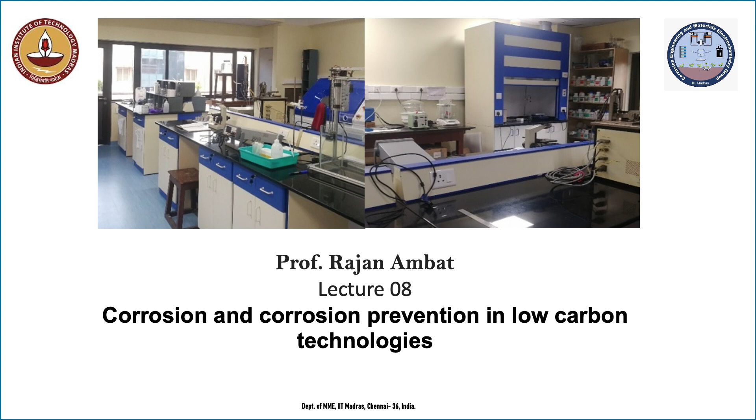So let us look into a little bit of corrosion issues and what people do there. I will mainly discuss wind turbine and carbon capture and storage related corrosion issues. That's what I will majorly focus on in this part, and I'll also talk a little bit about fuel cells and electrolyzers, and some other things from the literature, then give a perspective on other energy storage cases, showing what could be the corrosion issues.

When you look at all these, wind turbines produce electrical energy, fuel cells also produce electrical energy, while electrolyzers on the other hand produce hydrogen as a fuel, and that hydrogen fuel can be used elsewhere either to produce electricity or to be burned.

In all these cases, this power to X is also becoming important. People say power to X. Power to X means you are producing power, and that power is used for running different things, for example. There is something in between here, and that's where the importance of electrolyzers and things like that comes in.

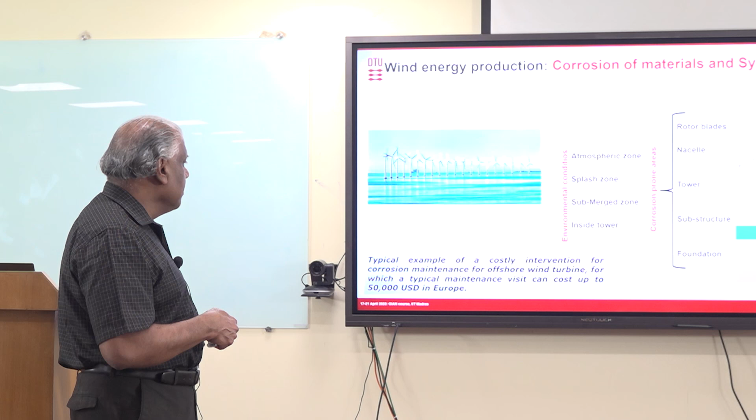I mentioned this in the last days, a typical example of a costly intervention is corrosion maintenance for offshore wind turbines, which costs about $50,000. So this is also an important thing. That's also a reason there is another strategy coming up related to wind turbines - proactive design and maintenance, which I mentioned earlier and will not take up again today. I will come to that together in Friday's lecture.

But let us look at the corrosion part of it. This is the way you can divide the whole wind turbine system. You have the foundation, which is going into the mud below the sea, and there are many technologies related to this, like the monopile, where just one structure is going down like a pillar. And there is another type with many legs - different technologies related to putting it under the sea.

Now they are also thinking about the floating type, meaning the entire thing will be floating in the sea, with something attached just to stabilize it, like a stagnant ship existing in the sea structure. So that's the foundation. Then there is the substructure part, then the tower part, then the nacelle where all the parts of the wind turbine are sitting, and then you have the rotor blades.

So there's erosion, and there can be particles, and since it's rotating at very high speed, even small particles hitting the surface can hit forcefully, causing other problems for the rotor blades - but not corrosion, since we're talking about metallic parts and the blades aren't made of metal. These are the kinds of things we have in the wind turbine, but we can also see corresponding differences - not just the corrosion problem itself, but the exposure environment is also different.

You have corrosion inside the tower. Maybe inside the tower the environment is a little bit more benign, because something has to enter into it, so it's not directly exposed. So the condition inside the tower - this tower is an open tower.

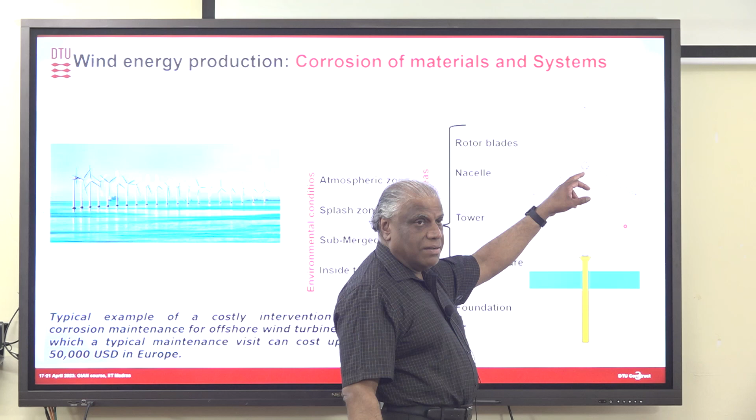It's like the base of the tower will be the size of this room. The wind turbine structure's diameter comes down as you go up. The bottom part, for the biggest wind turbines, may have a diameter the size of this room, and inside the tower it's like a building - you have a lift, and through that lift you can go up to the nacelle. Then there's an opening to the nacelle where you can get in, and that's how technicians go up to repair different things. So it's an open structure inside, with a lot of equipment sitting inside the tower as well, like the lift and other things.

So the corrosion inside the tower is also important, because there are so many things which are sitting there. Inside the tower, for example, there's the submerged zone. If you look here, below the sea you have that part, and then you have the splash zone.

You have different corrosion here because the seawater is splashing, and when seawater is splashing you get much more corrosion. Why? Alternate wetting is one thing, and also because of the higher amount of oxygen coming in, you have a higher corrosion problem - that is splash zone corrosion. Then we have the atmospheric zone, mainly the upper part, where aerosols and things like that are coming up, causing corrosion problems there too.

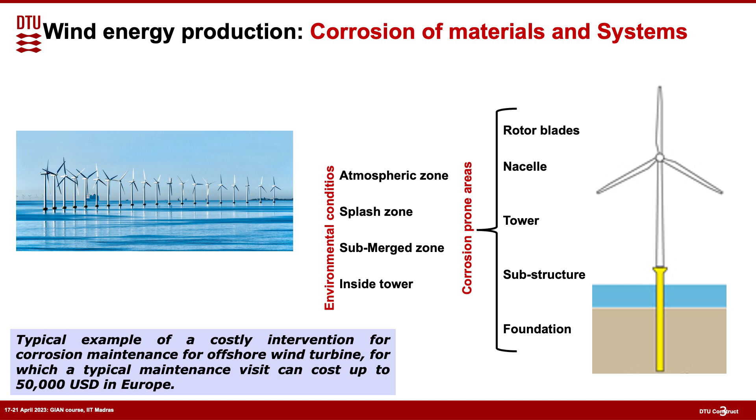So that's the way we can divide the corrosion problem in the wind turbine. This part as well has corrosion problems. Of course, it's not necessary that all these corrosion problems are relevant for everything, but there is a corrosion problem.

For example, here you can also have differential aeration, depending on the oxygen concentration, causing that kind of corrosion. You can have microbes sitting there causing microbially induced corrosion, and these microbes can also produce hydrogen as a metabolic mechanism, which can lead to hydrogen embrittlement issues.

And if you look at it, there is a lot of fatigue loading here, because when this is rotating, although we don't see it, there is a lot of vibration in the tower. Because of the wind and the sea, this is actually flexing a little bit, so there is a lot of fatigue loading. That means if hydrogen goes in, you can have hydrogen embrittlement assisting fatigue failure. So the mud zone also has a problem.

But maybe from the corrosion point of view, more issues are here rather than in the mud zone, because that area is inside the mud, and the corrosion there is less. But because of the splash zone, there is much more corrosion in this area.

So there's waterline corrosion - pitting due to differential aeration in this area. Again, they say it's pitting, but that depends on which material you're looking at and things like that. And of course, these structures are probably all heavily painted.

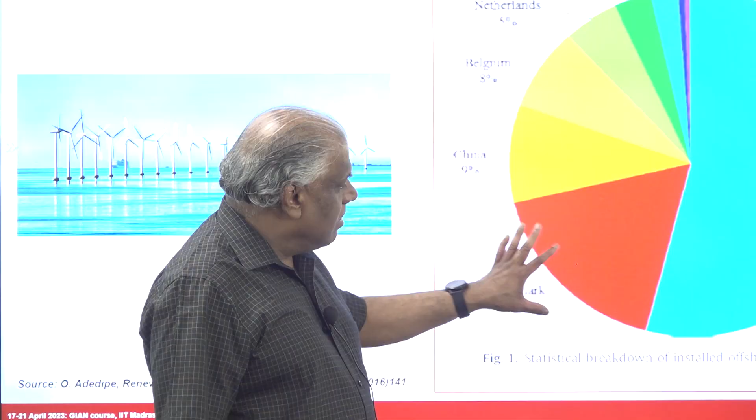Otherwise, Denmark is at the top in wind turbine installations and producing wind turbine energy. But you can see there are a lot of wind turbines installed in various places, and many of these wind turbines are offshore.

Copper is mainly related to electrical applications. Inside the nacelle, you have this generator which is producing a lot of electricity, and this generator has to be connected to electronics. So the power has to be transferred. What is the material usually used for power transfer?

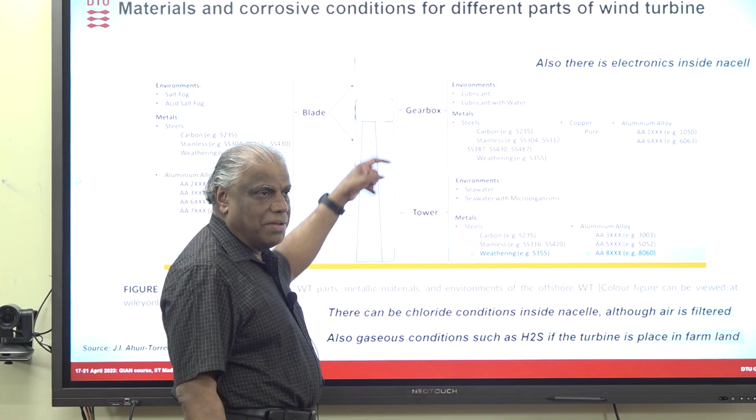That's the reason aluminium is used. So inside the tower there's a staircase made of aluminium, the lift part is made of aluminium, and all those things. So the load bearing structure is always steel in the case of wind turbines. Only accessory materials are made of aluminium, which also shows that corrosion of aluminium is not critically important.

Even if the staircase corrodes a little bit, it doesn't matter. Even if the cable tray in the nacelle corrodes a little bit, it doesn't matter like that. But much more important is the corrosion of steel parts and things like that. So there is a lot of steel and stainless steel and things like that.

Now if you take the other side, the blade side - not the blade itself, but some of the other parts of the blade - again there is a combination of aluminium and steel material. That's what you see. Taking away the electronics part, which I'm not discussing, these are the kind of things you see.

Now it's understandable that there's a corrosion problem here, because you have seawater splashing and creating a lot of corrosion. You can see that because of the agitation in the sea, this chloride condition will exist all over, because there are a lot of aerosols coming inside the nacelle. Usually the air is filtered, so all the air getting into the nacelle is filtered.

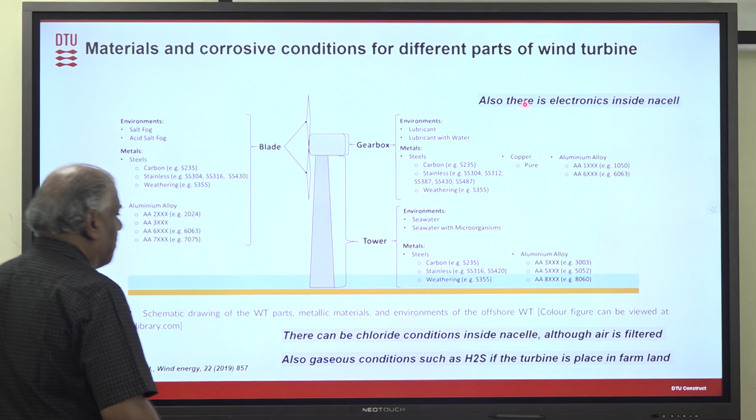There can still be chloride conditions inside the nacelle, although the air is filtered, because this filter is only for aerosols and particles. That means H2S gas can get into the nacelle too, since the gas can diffuse in like humidity, and it can also diffuse if the turbine is placed near farm land. I'll show you some examples of that.

So it's not like the nacelle condition is perfect. Inside the nacelle you can have chloride conditions and H2S conditions. As far as the humidity part is concerned, it depends on the time.

When the wind turbine is working, the gearbox inside produces a lot of heat, and that way the humidity is displaced. But most of the time the problem with humidity comes when the wind turbine is not working. The turbine can be shut down for 2 to 3 months for repair work, and then the humidity inside the nacelle will be very high — that's when most of the corrosion takes place.

So if you take the structure, you can see it like this: you have the wind turbine with blades, connected by this shaft to the gearbox. The gearbox is there to increase the number of revolutions coming from here, and that is transferred to the generator. The generator produces electricity, which is then converted using these electronics here to regulate it, and then that is connected to the grid. So this is the way it works.

So mainly the copper parts I'm talking about go from the generator to these electric connections here, and many of these parts are made of copper because we're talking about very, very high current. You need a real copper bar to take that current — a small wire isn't enough to connect between these two. So a real copper bar is needed. That's more or less the structure.

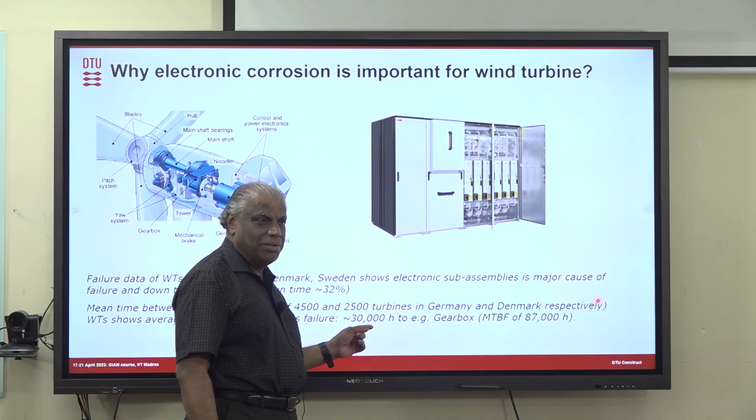They also calculated the mean time to failure for different sub-assemblies. It shows that an electronic failure occurs every 30,000 hours, compared to a mean time to failure for a gearbox of around 87,000 hours. That means that by the time a failure occurs in the gearbox, you'd need about 3 visits for electronics, because you could expect 2 to 3 electronics failures within that time, since the mean time to failure is almost 1/3 of that.

Now we can also see how this knowledge will help them to plan as well. So electronics is one of the weakest links in the wind turbine, and especially with the use of wind turbines in offshore conditions, it is becoming much worse. We will look at that in more detail tomorrow.

The reason the nacelle condition is quite good if the wind turbine is working is because the gearbox is producing a lot of heat. So most of the problem comes when the wind turbine is not working. When the wind turbine is not working, it becomes very, very cold.

Because you need to think of this as a very thick metallic sample. The problem with a very thick metallic sample from the corrosion point of view is that it takes time to heat up and takes time to cool down. And this is where atmospheric conditions make the corrosion problem more important.

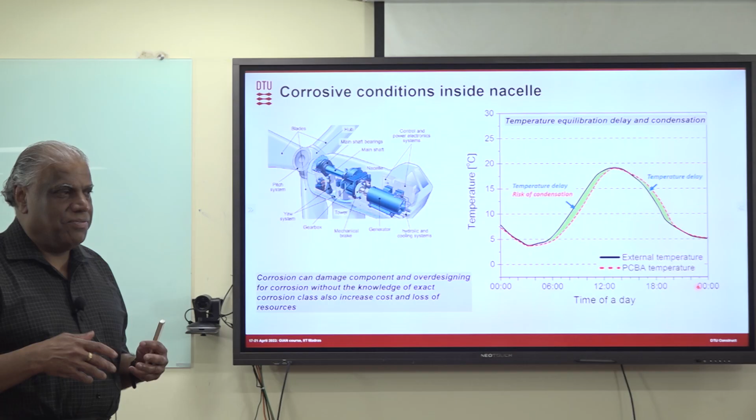I don't know whether this occurs here, but maybe this happens in December, January time. Have you seen that in December, January, when you go out and look at the car, there is a lot of condensation on it? The reason that condensation happens is because at night the temperature was colder, and there is more humidity in the air.

In the morning, the sun has risen, so the atmospheric temperature has gone up, but the car will take a little time to heat up. Since it takes time for the car to heat up, the car is still cold and condensation occurs on it. It will be there for about an hour, and after that it disappears.

So this is exactly what happens in the nacelle. Overnight, if the nacelle is off, because of this delay, that's what is shown here. This is with a PCBA, but there is a delay between the PCBA temperature and the external temperature. You can see the PCBA temperature is rising, but it is still colder than the external temperature, so this difference is what causes condensation inside.

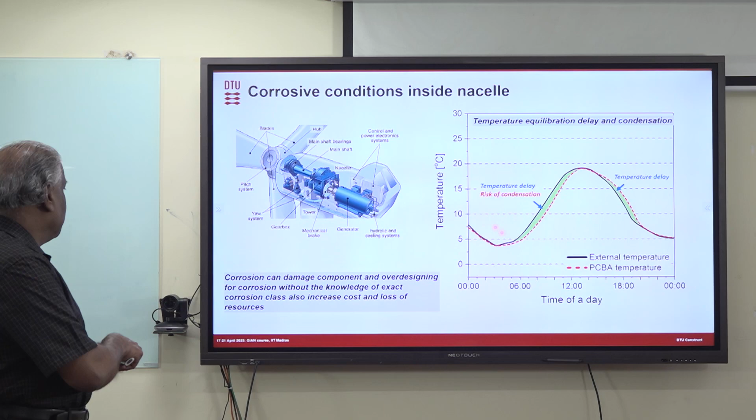So the PCB is just an example, but you can think about any material sitting inside, and that causes condensation at many different parts because of the heavy metallic parts, and then you get the corrosion problem. If you take any level of humidity and make things cool, you can see that you get condensation.

Like if you take a beer can from the refrigerator and keep it outside, you get condensation because the beer can is cold and the outside air is hotter, so you get condensation like what you see on the car. These kinds of things are accelerated by chloride deposition, so if there is chloride deposition inside, these effects will be accelerated. We will look at that in the last lecture, how this deposition assists these processes.

So what we did in our work is that we did a lot of work with Vestas, one of the companies that produce wind turbines in Denmark. This is one of the world's leading companies producing them. There are very few companies producing wind turbines: there is Vestas, a Danish company, and there is Siemens, whose wind turbine part is also in Denmark.

Actually there's also an Indian company called Suzlon or something like that, and there is a Spanish company. So not many—there are probably 7 or 8 companies producing wind turbines, and Vestas is one of the leading companies. Almost half of Vestas is in Chennai. I don't know exactly where it is located, but half of Vestas is in Chennai.

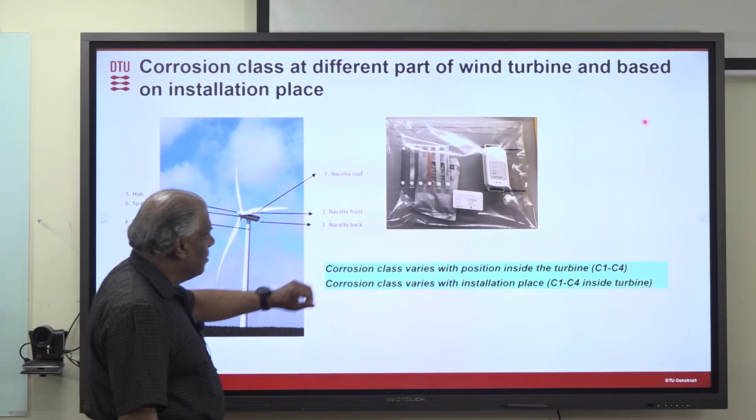We did a study with them, a kind of corrosion analysis. In this particular case, at the time we were doing it, we used corrosion coupons—I think silver, copper, zinc coupons, aluminum and steel. All these coupons, along with humidity and temperature sensors using a standard method, were kept at different parts of the wind turbine for one year. After one year we took them out; during that period they collected humidity and temperature data, and the coupons got corroded.

After 1 year, we can analyze the corrosion level, and from that we can determine what kind of environment was there inside the different parts of the wind turbine. From the corrosion product, we know what it is, and from that we can predict the environment and corrosion level. We can come up with the corrosion class that corresponds to the wind turbine, and all this information is useful for Vestas to plan different things.

We exposed such coupons in multiple places: bottom of the tower, top of the tower, in the hub, and inside this part here. We had sensors inside the nacelle, both front and back, because the electronics sit in the back of the nacelle. So all these places we had coupons, and then we take them out and analyze.

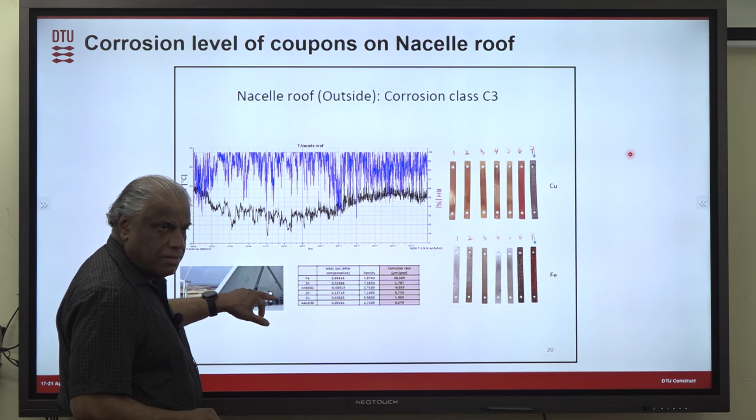Here you can see, for example, I took one wind turbine to show how it changes. This is the nacelle roof — top of the nacelle, outside. This coupon sits outside on the nacelle and collects humidity data. The blue color represents the humidity data, and you can see that humidity is always 100% outside — always at saturated humidity level.

That means there can be a lot of corrosion problems there, which is what you see in this table, which I'll expand. If you look at the corrosion level, it's quite high here, especially for steel — around 38 micrometers per year, which is what you get on the nacelle roof. But the important thing is, I'll show you another slide to see how it varies within the same wind turbine. This is outside, and from the level of corrosion we can determine the corrosion class. Here, the corrosion class is C3.

If you take a C5 as a sea side, imagine from the sea side, and C5 is inside the sea, and C3, C4 is somewhere away from that farmland. So around that condition, the C3 and C4, that's the level at which you have the corrosion right here. Then we go inside the nacelle, wherever it's put, and there we determine and see that the corrosion class is C1, and you can see that the corrosion rate is much lower compared to outside, inside the nacelle.

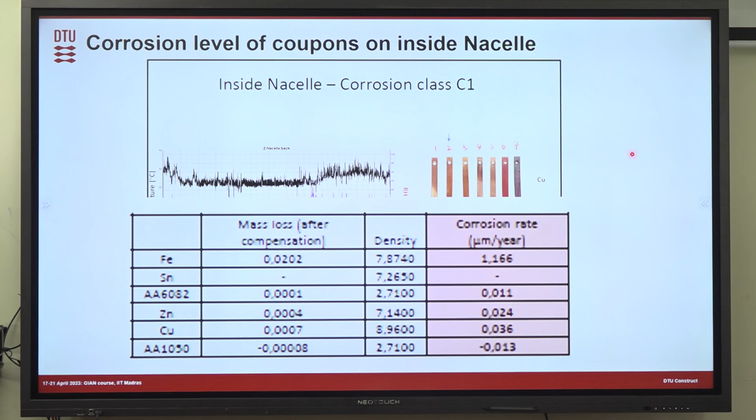Inside the nacelle, the humidity level is much lower most of the time. You can see the humidity level is probably only around 60% or 50%, except in some time it has increased, but otherwise humidity level is lower, and that also gives a less corrosion rate. So there you can compare that corrosion class 3 outside, and the corrosion class is coming to C1 inside the nacelle, on the same turbine for example.

Oh no, I think you need to ignore that. Basically what it shows is that the corrosion was so low here that you just ignore that value and take it as 0, because the corrosion rate is so low in this case, and when we clean it a little bit of material is removed from the cleaning process, and that is what you see. So it's 0 basically.

I don't remember the exact size, but it's a standard, an ASTM ISO standard, and I think it is around 4 or 5 centimeters, and this width is around close to 1 centimeter or 1.5 centimeter.

Yes, this is one set. Like if you look at here, this is one set, like this way. So you have a plastic board, and it is put like this, if this is what you are asking. So each one is one material.

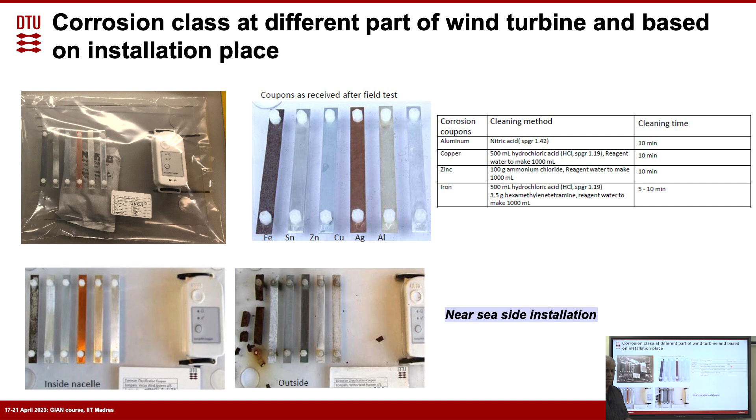If I understand correctly, this whole thing is kept at different places. So everywhere you have all these materials, and you have a humidity and temperature sensor. So we get the humidity and temperature data from everywhere over this one year period, and also we get the corrosion rate, for each material concerned, not everything, but for example, iron.

People have done the experiment and classified into C1, C2. Similarly for zinc, there is a corrosion class and everything. So all these are based on that. If you look at the copper, iron, the distribution of iron, distribution of zinc here, like that, and based on all these it is approximately the C3 class.

So it's everything considered here. Put in other way, in the C3 class, corrosion of iron will be higher compared to corrosion of zinc. Corrosion of zinc will be lower in the C3 class. In C1 class also the ratio will remain almost the same. So it's based on all of them, it is coming to the C3 class. That's the idea. It's just compared with atmospheric corrosion data where it is classified into the C1, C3 level. Approximately, I'm not saying it certainly matches that, but that way it is classified as C3.

Is that what you're asking? Yeah. So it's not just based on one metal, but considering the whole different things like the distribution of copper, zinc and iron. Yes, exactly. Similarly for the zinc as well. So you can see that basically if you take this value of the iron and this value of the zinc, in both cases it is close to C3, like that.

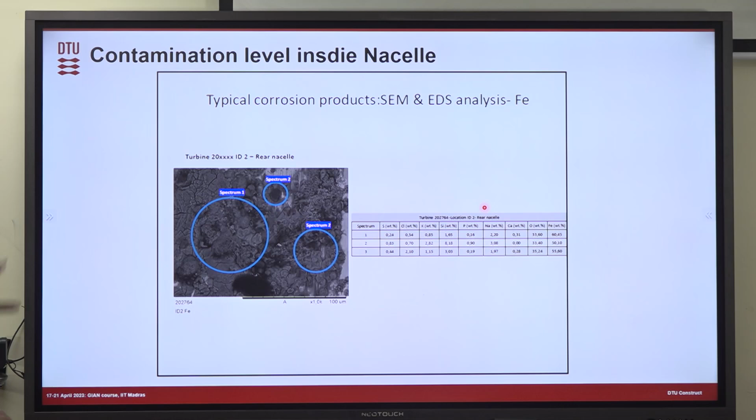We analyze the corrosion product, then we do the SEM analysis and we analyze the corrosion product. The important thing here is to show that there are many things you will see here. Important thing to show is that it has chloride. This is coming from inside the nacelle.

This is from inside, there's a spelling mistake there, it's inside nacelle, and you can see there is chloride and sodium, which also shows that this must be sodium chloride. So although the air is filtered, still some aerosols are getting into the turbine, and that is probably causing this chloride to appear. You can also see a few other things, there is sulfur. So probably the reason is that there are some sulfur gases in the environment which also entered into the nacelle and created some sulfur-containing compound.

But we couldn't answer at the same time why this phosphorus is coming and like that, because it's too complex actually. But on the other hand, ignoring the things we don't expect, if you take the other one, at least we can see that there is chloride and sulfur. We also have seen that when we go to a farmland and measure the sulfur gases, we could see that there are sulfur gases in the air.

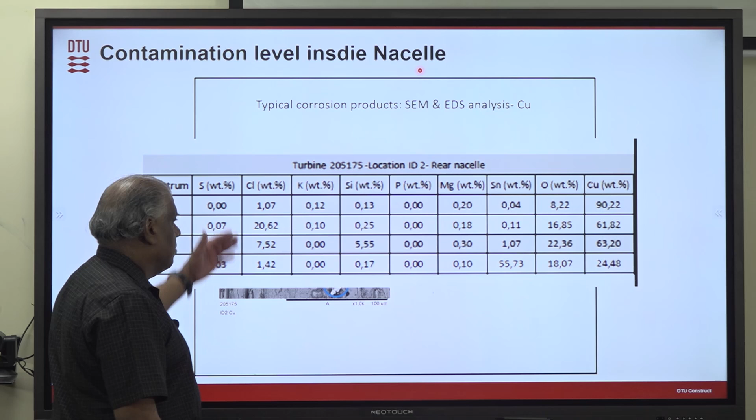And this is another analysis. Again, you can see that there is chloride, and there is a lot of chloride here. It is showing that although the air is filtered, chloride can still be there inside the nacelle. And if there is chloride, you'll see, like the last class, you don't need high humidity to get condensation, because chloride is hygroscopic, so you can get condensation with a lower humidity level as well.

Why have we done all this? Because this is another one, and it is still showing the same thing, that there is chloride. So everything is to indicate there's chloride. Why did we do all this? Because we did this in Denmark, China, Uruguay, Peru, Nicaragua, Dominican Republic, Chile, and Chile farmland, coast and farmland.

So this is at different places in the world to identify what the corrosion class is, more or less. Once they know the corrosion class, this company, Vestas, can make a better decision related to how they want to supply and make the wind turbine. One thing they found was that in places with a lower corrosion class, they were still selling the wind turbine made for C5, because they didn't want to take chances. So they sold the wind turbine made for C5 class when that was not actually needed, so they can save the material, and the customer can save on cost.

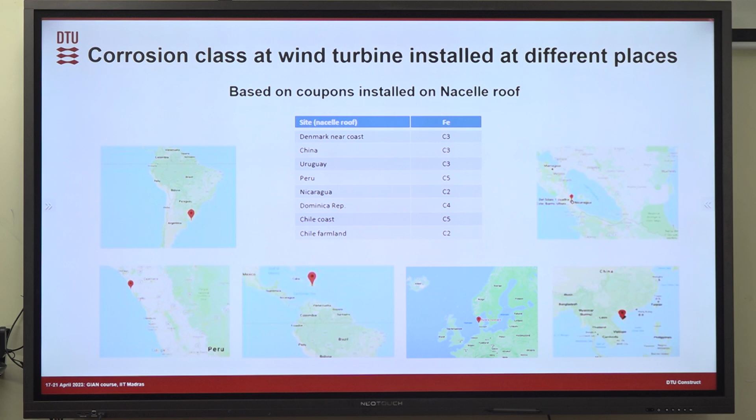But the problem with this measurement is that we use coupons, and we keep them for 1 year, and during that year it is blind - we don't know what is happening. But now we've made a sensor, an online sensor, so we can get real-time data like humidity and temperature, and there are two other sensors determining the condensation possibility and things like that, so we can get much more online data using that. That makes it much easier - we don't have to wait for 1 year like that.

Second thing is that, here we have the corrosion class we measured. In all these places, basically all this corrosion is coming because of the external climatic conditions - the humidity and temperature. So we made a climate app which this company can use. Looking at the climate app, they can understand what kind of climatic condition exists at a given location, and they can easily find that. And once they find the climatic condition, they can also look at what is the corrosion class there.

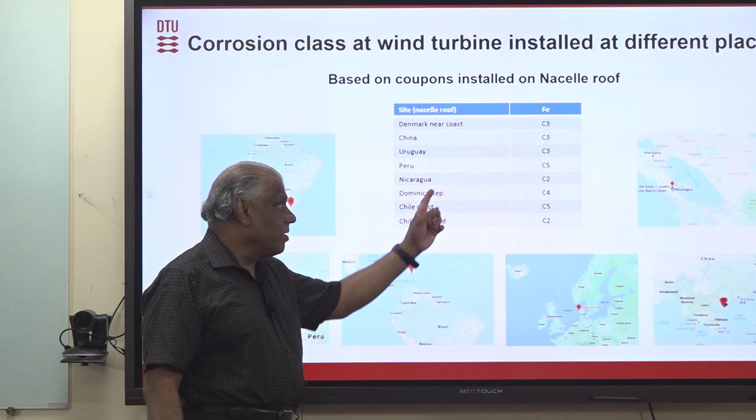That corrosion class in the climate app is not coming from our testing - it's coming from CECRI's atmospheric corrosion test sites, which they have at different places. Probably your institute, your building research institute, has one too - do you have an atmospheric corrosion test site? No, you don't have. Okay. But CECRI has one, I know CECRI has atmospheric corrosion test sites at different places. Similarly, in the world there are many places with atmospheric corrosion test sites, and all these people have determined the corrosion class related to it.

So what we did, I'll show you, is that in the last class we made the climate app. That means we collected all the climate data from the world, and we used a machine learning algorithm to group this climate data so the entire world can be divided into a few zones - high climate, low climate, and so on. Then we overlapped this climate data with the atmospheric corrosion data collected from different atmospheric corrosion sites, so you can also know that a given region has C4, C5, and so on.

So now we overlapped their corrosion data, but what we are trying to do is that since we have data at different places, we can interpolate. And that way we can make a little bit more information on that. But I'll show you that.

This climate app is helping companies to take these decisions so that they don't depend only on coupon data, but use the atmospheric test data which people have developed, and humidity data available. When I show that app in the last day, I think you will understand what it means.

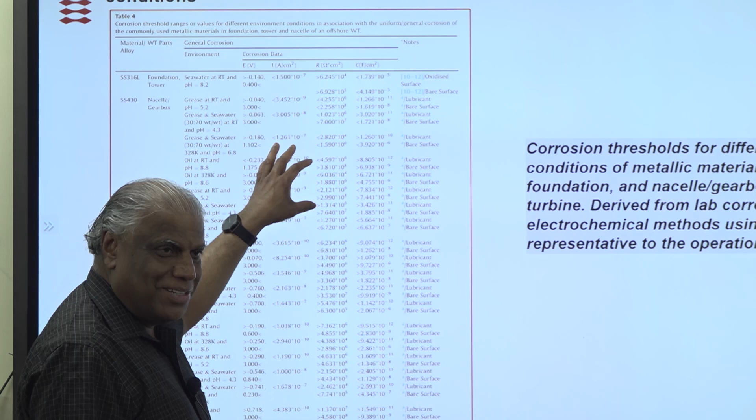This is not coming from our study, but from another study. That's the reason I put that table, although it's probably difficult for you to read. What they did is they took materials like steel and aluminum used in the wind turbine, and simulated the conditions seen in the nacelle and other places in the lab, then made corrosion rate measurements from that. So they can get an idea: if they use this material inside the nacelle or gearbox, and the gearbox has lubricant, some material is corroding, and that corroding environment will be lubricant mixed with water—what corrosion rate could they expect in that condition? Similarly, in other places with other environments, what corrosion rate could they expect? Like that, they made this table.

I felt it's quite a nice simulation, exactly simulating that environment in the lab. It can be used to make a model out of that, and it can be used again to predict something—meaning all these places need a very, very high protection level.

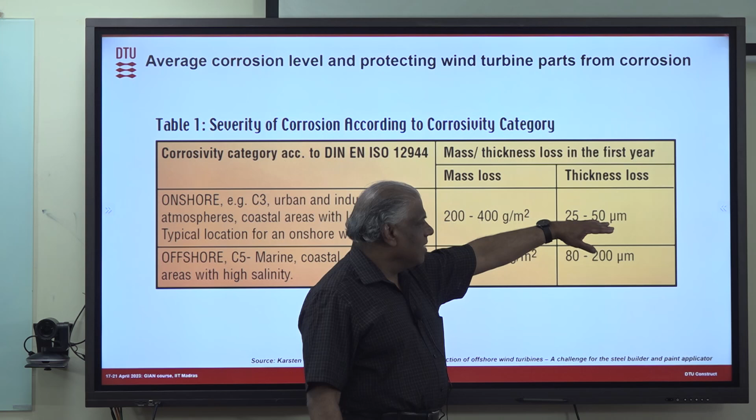So this is just showing an onshore wind turbine where you have C3 conditions and the kind of thickness loss. If you take the tower part, the kind of thickness loss you'd expect is around 50 micrometers per year. That's the corrosion level you'd expect.

And if it is offshore, which is C5 condition, you get into around 4 times that, around 200 micrometers. That's the kind of corrosion level you're expecting, which also means you need to have this level of protection.

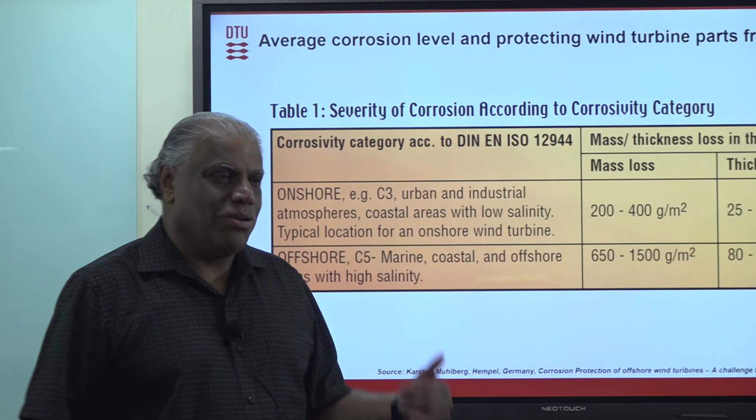Remember that 200 micrometers itself is not a big thing—think about a very thick steel tube for the tower. So 200 micrometers itself is not a big thing, but the problem is that this 200 micrometers is an average corrosion level. In one place it could be 2 millimeters, another place only a few micrometers, like a pitting sort of thing. And then you have the fatigue issue. Most of the time corrosion itself is not causing the problem, but at the end it is fatigue—corrosion fatigue is the one causing the problem. If you have a pit and it goes deeper, that acts as a crack. So that's the issue, just to show it's quite severe in that sense, and you need to protect against that.

So that shows the protection strategy. Just to give you a glimpse of the level of painting they do—this is a C5 marine condition. There are different standards: a German standard, an ISO standard, and a NORSOK standard, different standards in relation to painting. But people follow only one of them, not all of them. It's just to show you a comparison.

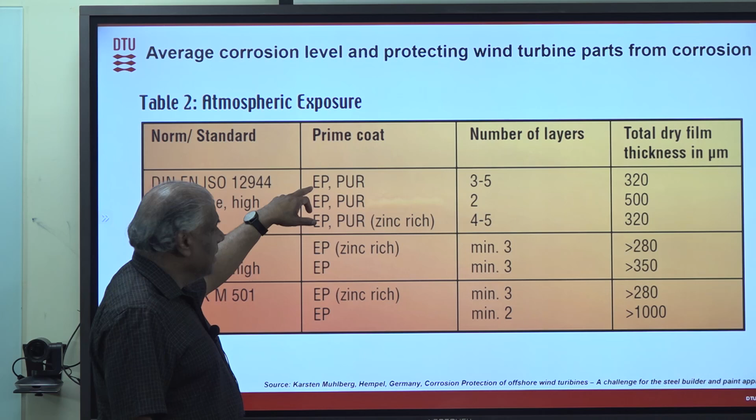Whenever you see EP, it means epoxy resin covered, and PUR means polyurethane. PUR zinc-rich means the PUR also contains zinc plates, so it acts as a galvanic zinc coating—that's why it's zinc rich. You can see they put many layers, almost a thickness of around 320 micrometers for the atmospheric exposure part. The NORSOK is actually much higher than that, going up to around 1000 microns. So it's quite a big thickness of paint put together to protect it from corrosion.

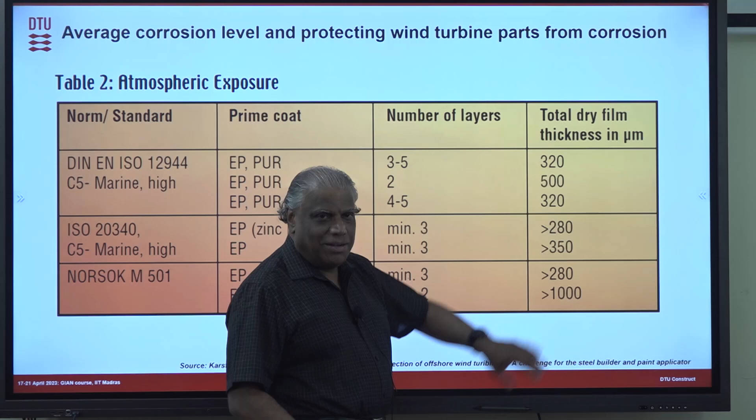So even the painting, they do it at different levels, because it's such a big structure. Every rupee or whatever they can save is an important thing, so they want to save a lot. At the same time, the system has to work perfectly for the period. So there is a lot of things involved in that.

The electronics part, I told you that I will come to in the next lecture. So that's a little bit on the wind turbine part. Then I'll get into another area. Is there any questions related to this part?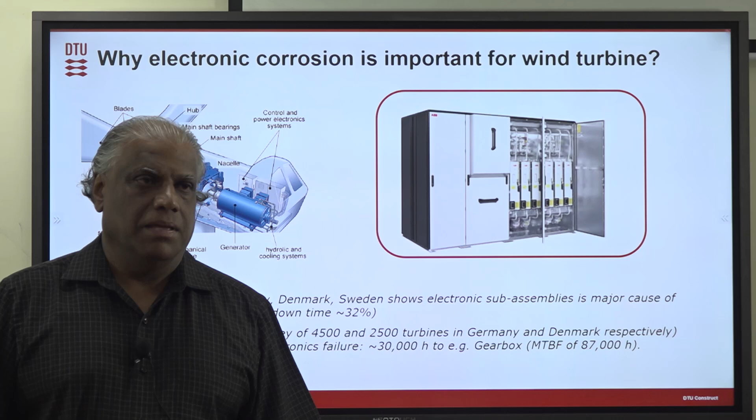Let me see what you mean. It's protected, this part. This part is cathodically protected. The bottom part is cathodically protected. Whatever is in the seawater, that part is cathodically protected.

Splash zone, you cannot protect it like that, right? Splash zone is dependent upon how the water is splashing and where it is wetting. So the cathodic protection may work there, may not work there, like that.

Any other things? Yeah. Yes, you are right, because maybe you remember the first table which I showed. There I was telling that acidification can also cause hydrogen embrittlement, because hydrogen is produced and that hydrogen is reduced right on the surface, and that way it's possible for it to enter. It's also causing the hydrogen embrittlement.

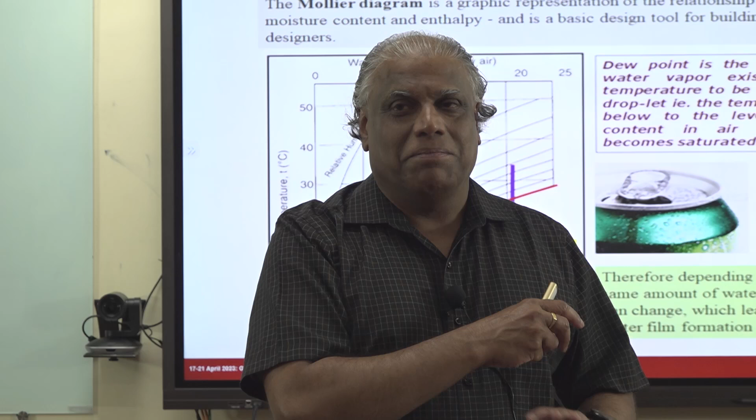I don't know about how much of a corrosion fatigue issue there is in failures. I don't think that, put it this way, none of the wind turbines has failed because the tower failed until now. Only thing is that they know that the tower is going to fail, or the tower will have a problem to take care of. So that's the only thing. None of them has failed because they made it safely enough.

All the wind turbine failures until now are due to electronics, not due to the tower or other material. Electronics, which has a corrosion problem, resulted in fire, and inside the nacelle it caught fire, and then of course everything is destroyed. So that's what happened, not due to tower failure.

Tower failure—I haven't heard of any wind turbine failure due to the tower, but they analyze for corrosion fatigue and do non-destructive testing and all those things. I'm sure that they must have identified whether there's a hydrogen embrittlement issue, stress corrosion cracking, and all those things. So all these issues can be there.

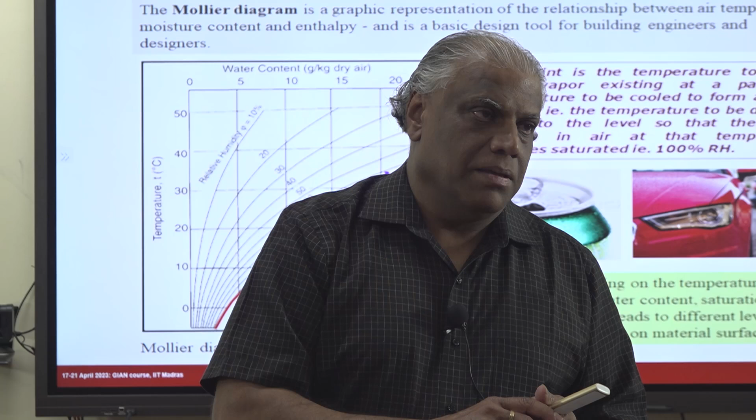Yes, there is. This is in our department, not me, but there is another group. They are working on bearing failures inside the gearbox because of fatigue. And there they say that yes, there is a hydrogen embrittlement issue there as well. Yes, it's true.

Yeah, maybe yes. Yeah. Yes. Then how did you correct those?

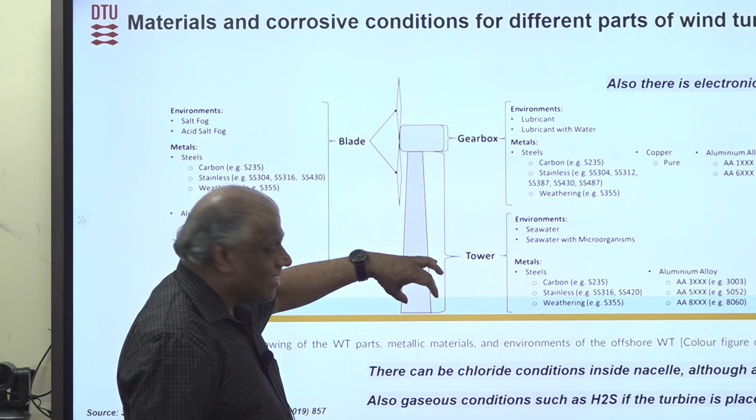I think, if I'm correct, what you're talking about is like in those pictures, you see that rust coloring there, right? But that's after repainting. Yes, they did the repainting, and the corrosion may not be that much. And the question is like this: the wind turbine may work for 25 to 30 years.

So whether you can extend the life until 30 years, this is the question, right? So there's no problem to have it like the aircraft—an aircraft wing can have a crack, as long as the crack is not critical.

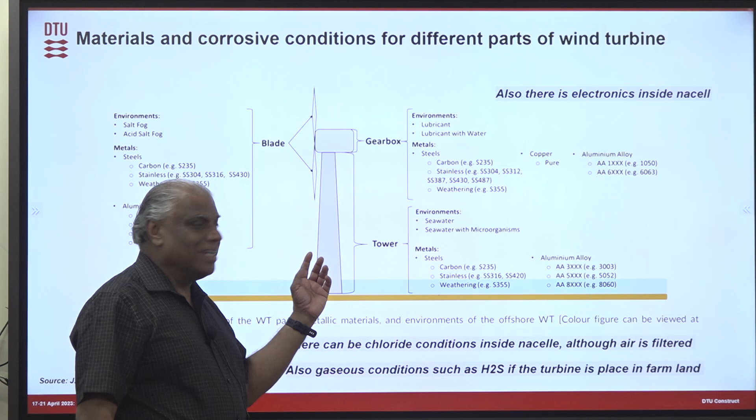Still the aircraft can fly, so it's exactly the same way. If they measure the corrosion level and know from fatigue and different models whether that's critical or not, if it's not critical, the system can still be stable. The only thing is that by the time they start seeing the corrosion, they need to take remedial action immediately—strip the paint and paint it again, and things like that. They need to protect it, that's all. So extending the lifetime to 25 to 30 years is the goal, not completely stopping the corrosion.

Corrosion can be allowed as long as the structure is still stable for 30 years. That's all.

Sorry, coupons, yeah.

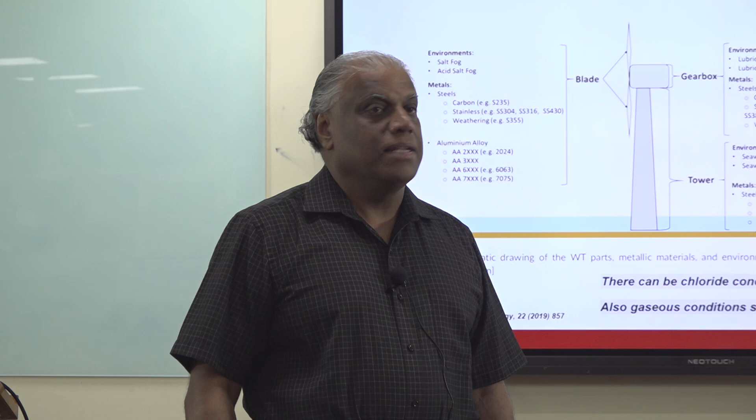The steel we are talking about is carbon steel, so that way it's an alloy. Aluminium is an alloy, a 6000 series, right? But other things are comparatively pure metal, because copper is used as pure metal. Silver is used as a part of electronics as a pure metal. So those are pure metals, and zinc is also more or less pure like that. So those are the pure metals, but aluminium is an alloy and the other one is carbon steel.

So that's because it's imitating what is there inside the turbine.

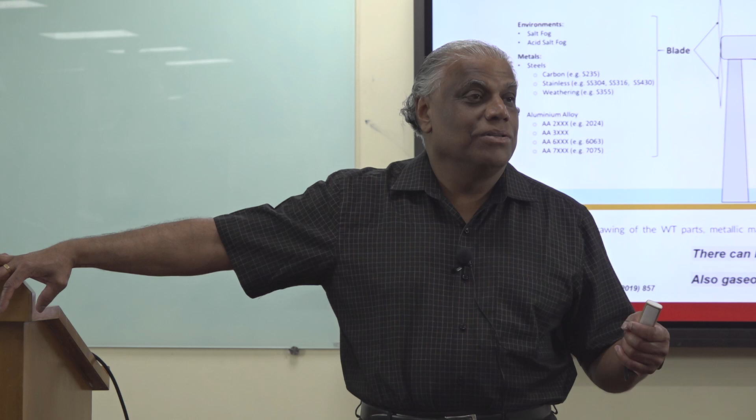Yes, corrosion rate data is - that's what I was talking about. CECRI has that atmospheric corrosion test site, right? That's an example. They exposed many materials there and came up with corrosion rate data over many years. Similarly, there are probably many atmospheric test sites over the world, and this corrosion data is available. So anywhere in the globe, you will be able to find an atmospheric corrosion test site at some places, and that corrosion data is available actually.

Not only corrosion data, there is corrosion data for steel and other materials. There is chloride deposition data, humidity data. So there is so much information there, and we overlapped that information with our climate map. That's what we did - I'll show you later. So that's the answer for it. Every point you don't have, but you have at many places.

And now what we are trying is that when you have the corrosion data at some points, you have these two points of corrosion data, but you have the humidity and temperature data for in between. Using that humidity and temperature data, and using the humidity and temperature data here, we're trying to interpolate this corrosion data to other places.

So there is a lot of corrosion data available from the atmospheric corrosion test sites all over the world. It's a coupon method, actually exposing coupons at different places.

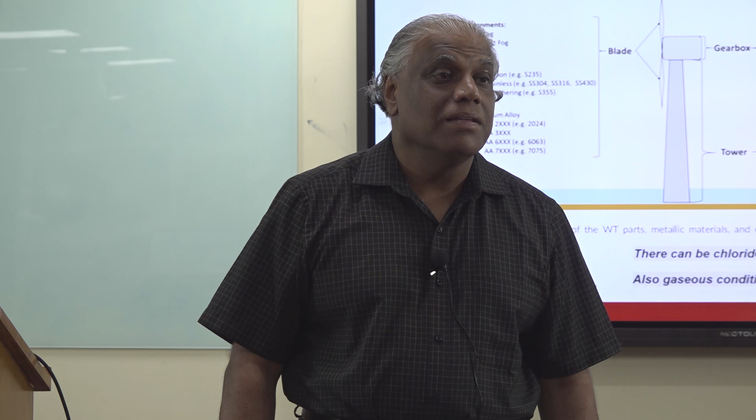Yeah. Yeah. I don't know. You say real-time monitoring method. Sensor, right?

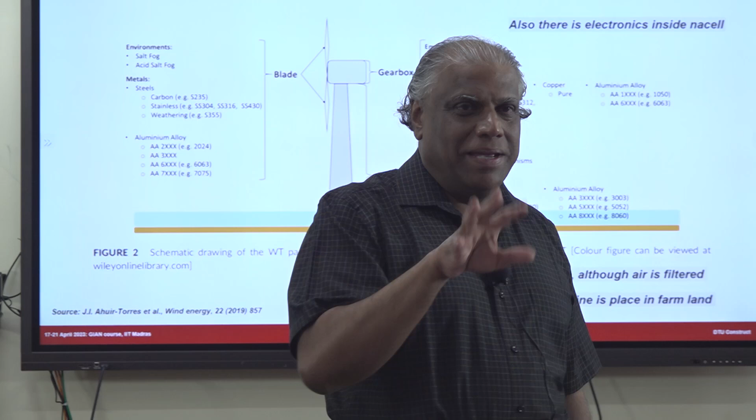You know, there is a paint company in Denmark called Hempel. They are the ones actually making the paints for all this heavy duty painting. There's also a part in India, I think it's Pune, where they make a lot of paint. This company is now working towards making an impedance sensor which can be placed below the paint. Not for normal paint, but for big painted buildings or painted wind turbines where there's a lot of paint. There it is very important to monitor how the paint is degrading.

So they have an impedance sensor which is put below, and they are trying to get online transfer of data and analyze it. Actually, this happened from our lab because we use these impedance sensors so much in our electronics - electronic structures are like that, you'll see when we go tomorrow to our test systems. We use in electronics these kind of comb structures, interdigitated structures, and this paint company asked me, why can't we use this as a sensor for the paint? So one of my PhD students joined there as a postdoc, and he developed it so much.

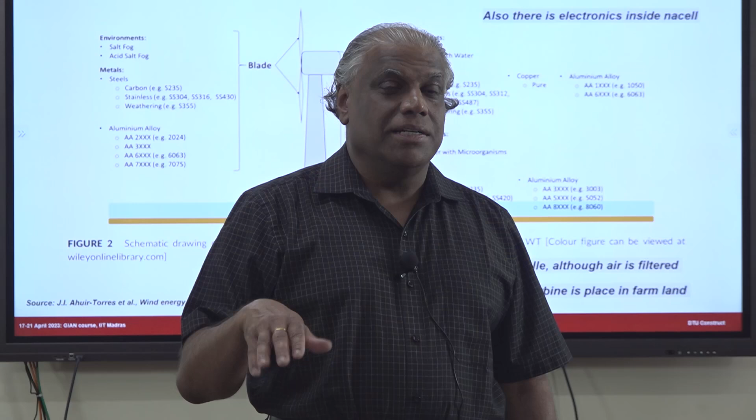What they do is take the metal surface before painting, and they can even do it on-site using a robot. They make a metallic structure by a printing process, then paint it, and this printed metallic structure is connected electrically to the system so they can do online monitoring. If you do a similar thing inside this one, where you have the paint and then the metal surface, or here you have the paint, your cement and the rebar, then you may be able to monitor this.

Of course, the only thing is that what I can give you is this comb structure and general information on that, but everything else - how it is electrically connected and how the data works - is confidential because it's company property now. But that's an example to see.

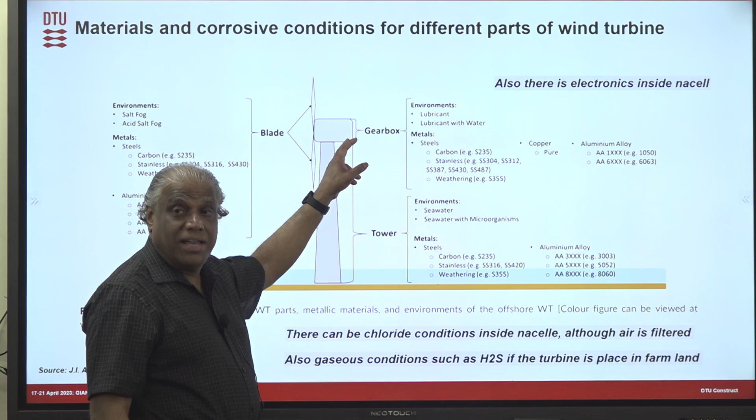So for the nacelle, most of the corrosion problem inside occurs when the wind turbine is off during repair time, because then it is cold. So one way of avoiding that is to use a dehumidifier inside during that time, and that way you remove the humidity. That's a solution. But the only thing is nobody wants to do that. Many customers, Vestas will tell them that whenever you are shutting down, you need to use a dehumidifier inside. But no, people will not do that. That's the issue.

Let's go a little bit into the carbon capture and storage part now.

So the other thing is that wind turbine is a low carbon technology in the way that it's not emitting carbon dioxide, because we are not using fuel to burn and make something. The other way to make it clean energy or clean atmosphere is that you collect the CO2 from power plants and things like that, and then push the CO2 down into the earth, and that way you can store it so it's not emitted into the atmosphere.

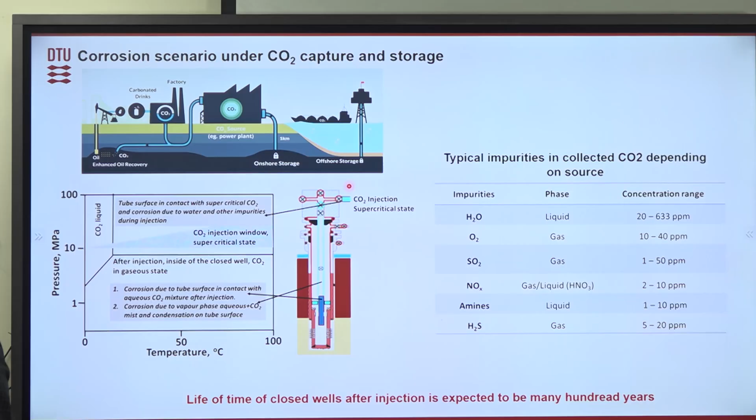So from power plants, factories and things like that, there's a lot of CO2 emitted. You collect that CO2 and liquefy it, and after liquefaction you push it into storage systems, store it and close it. That way you can reduce the carbon dioxide emission.

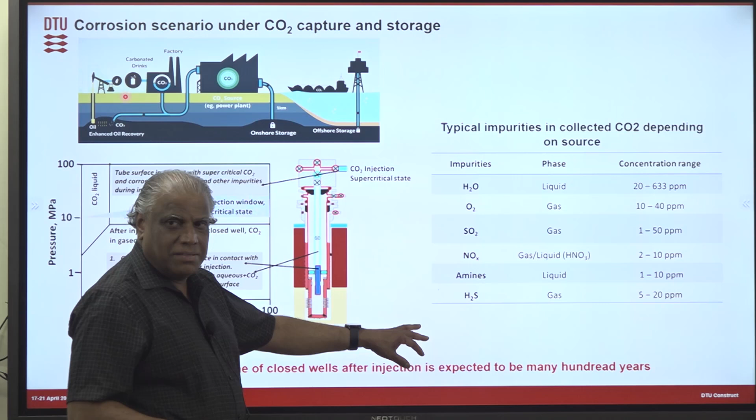This is the kind of thing people are trying to do, with many different technologies coming up. The problem is when you inject like that - think about this oil well shown here. There is already an existing oil well, a reservoir where they had the oil. This is a well, so the oil has been taken out through this well, and now the oil well is empty. There are many wells like that all over the world. Now the question is that this reservoir has a lot of empty space, so they can inject the CO2 down and store it there instead of oil. Once it is filled, you close it, and then it has to survive like that safely for 1,000 years or 500 years without any problem.

That's the condition. So inside this oil well, if you take this part of the structure, it's made of metallic material - metallic tubing. Until you reach the reservoir, you have the metallic tubing, and then the reservoir. If this metallic tubing corrodes, the carbon dioxide can come up - this is the problem, even after blocking it. Those tubing will get corroded, and that's also the problem with corrosion in oil and gas. So there's a lot of similarity with corrosion in oil and gas; only how it occurs is slightly different.

And the material used here is plain carbon steel. Why do they use plain carbon steel? Although there's a lot of corrosion problem, it's cheap. So in order to be profitable, they use carbon steel there. That's the problem - there's a lot of corrosion problem.

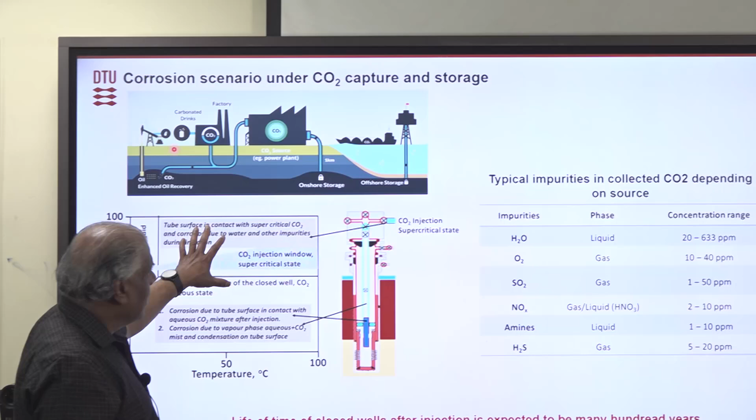Now when you look at how the carbon dioxide injection takes place, they collect the carbon dioxide and put it into a supercritical state. The supercritical state of carbon dioxide occurs at certain pressure and temperature levels - like this conical shape here shows. You can have 50 degrees centigrade, and you need up to 10 MPa pressure for the carbon dioxide to be in the supercritical state. I'll tell you what supercritical state is. If you have a lower temperature in this window, or a higher temperature, you need a higher pressure accordingly.

In this window, the supercritical state exists. Supercritical state is nothing but, you can take it as liquid state. Why is this called supercritical? There is a state between liquid and gas. It looks like liquid, but it is not totally liquid, not totally gas. So that's what is called the supercritical state.

Why are they interested in the supercritical state? Because supercritical CO2 is very easy to transport. That's the reason they want the CO2 to be in the supercritical state. That's the case, that's the way they do it.

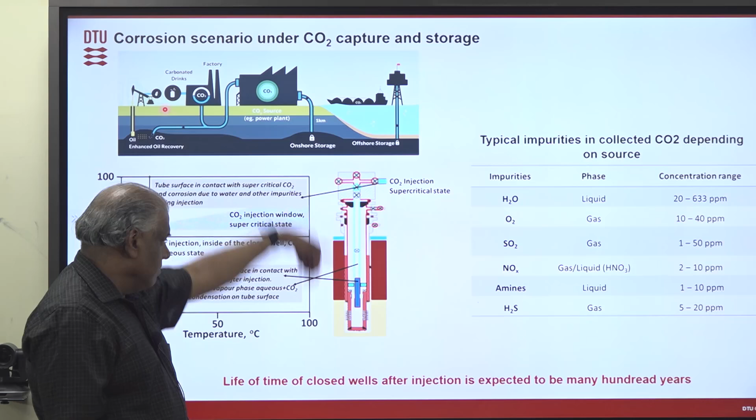They collect the CO2, pressurize it into supercritical state, and pour it into the well. The amount of CO2 collected can be so much that it can be continuous injection. So there can be a place where CO2 is pumped through the tubes, and it can be continuous injection as well.

Now coming to the corrosion problem. What is the corrosion problem? Supercritical CO2 itself is benign. It will not do anything. Liquid CO2 is not corrosive.

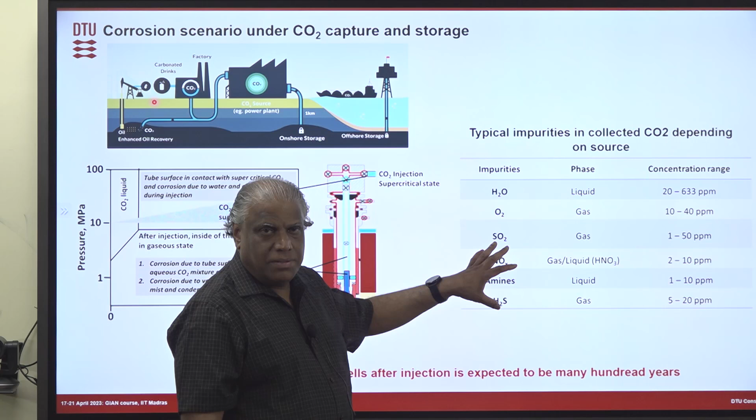The problem comes because any CO2 collected from different sources can have some contamination. It can have a little bit of moisture content, oxygen content, or other types of things as part of it. This water content, moisture content, and other gaseous content at tiny levels is what is causing the problem, and that is what is causing the corrosive environment.

Now, with all those things, what kind of corrosion problem can come? Think that this supercritical CO2 is injected through this tube. While it is injecting, your CO2 is in supercritical condition, with very little amount of water and gases. This little amount of water and gases can condense on the inside surface of the tube.

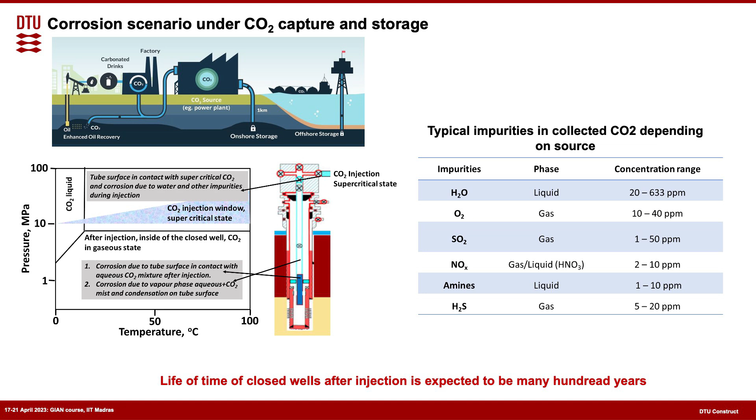But that condensed water has a problem, because it is very little water with these gases dissolved in it. Since it is very little water with gas dissolved, the pH will drop down to even 1, a very, very low pH level, because the pH depends on how much gas is dissolved in the water. Since the amount of water is less, even with a small amount of gases, the pH will drop.

Not only that, when it is pushed in supercritical form, everything is pressurized. When you increase the pressure, you dissolve more gas into the water, so the pH will be very low. So all the water that is dropping out here in this condition will have a very low pH.

Then the CO2 will go down, down, down to the reservoir. Once it reaches the reservoir, during the flow it will get depressurized, and once it reaches the reservoir it becomes gas. But then there is a lot of water in the reservoir, so once it reaches the reservoir it becomes like soda. The CO2 dissolves in the water and becomes like carbonic acid.

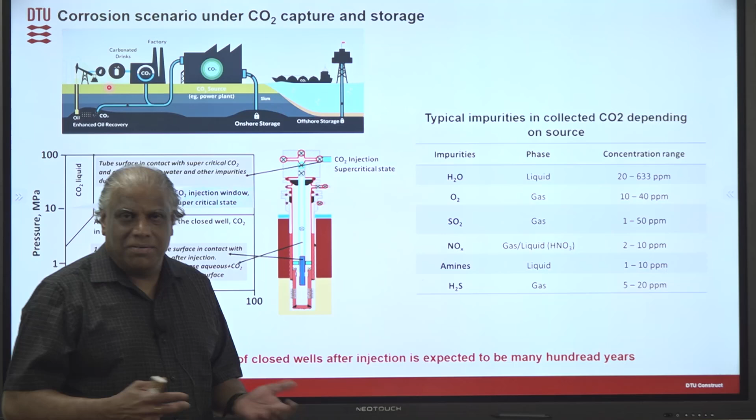Then you have another corrosion problem, carbonic acid, because now it is aqueous phase CO2 — aqueous phase saturated with CO2. Earlier it was CO2 phase saturated with a little bit of water. So this is a corrosion issue, and this is also the complexity of the corrosion. It is not the same, and that's what we are trying to find out.

What they want to find out, while we study the mechanism of corrosion, is to make a model at the end. That model should tell, depending on the purity of the CO2, what the corrosion rate will be. That's what they want — a model to say what the corrosion rate will be depending on the purity of the CO2.

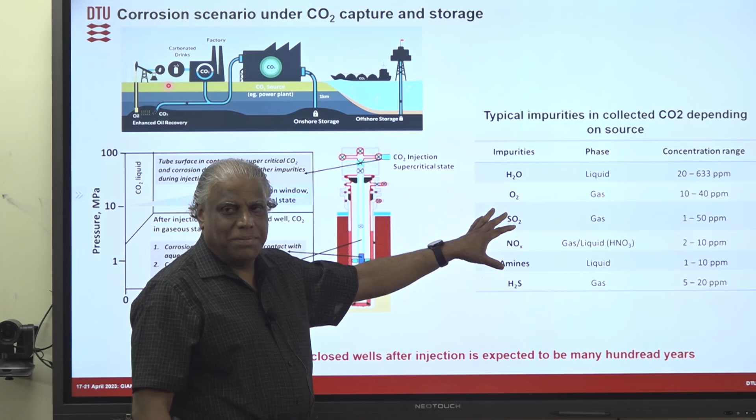We can also look at it another way — they call it sensitivity analysis. Sensitivity analysis means, say today they collected CO2 from one place, and tomorrow they collect CO2 from a cement factory, where they find the SO2 level is 100 ppm. If they have a model, they can put this contamination into the model and say that even with 100 ppm, the corrosion rate will increase only 10%. It doesn't matter — you can inject that information like that. So that's called sensitivity analysis.

So you can also use a model for sensitivity analysis. This is the kind of rough idea to come up with. Good question — you can remove everything, but then the CO2 injection costs become very high.

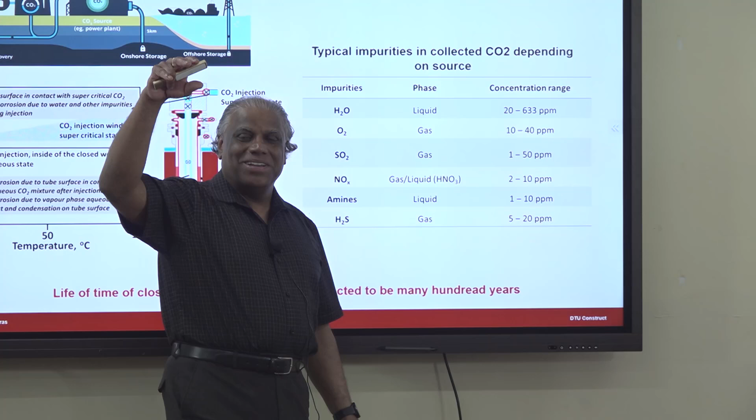So this is another thing. All these processes of collecting the CO2 and injecting the CO2, who will do it? Some company has to do it, right? Companies will not do it unless it is profitable. So where does the money come from? Where do they get the money?

Money is coming from, at the end, for example, what the Danish government will do is say that all the power plants have to pay a tax, depending on the amount of emission they need to pay a tax. A cement company has to pay a tax. This tax money is the one which goes to the company doing the injection.

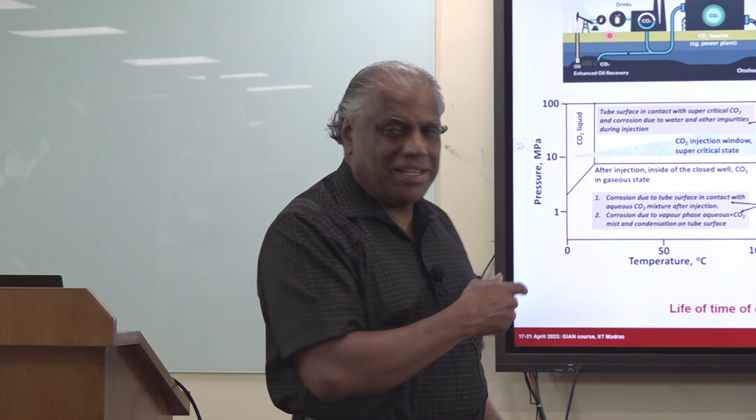If they have to purify the CO2, then it becomes a non-profitable business, so that is not viable, unless the CO2 is extremely bad. So that way you cannot remove the water - you need to inject it with water or other impurities.

So this is just showing that this one CO2 source, the CO2 capture plant, compresses that into the supercritical form, transported through the pipeline, down into the well. So that's the way it goes - the continuous injection from collection to the injection into the well.

So this shows different possibilities. People are also using earlier CO2 to push the oil. Earlier, in order to get more oil, they put the CO2 down, which pushes the oil, and that way they can produce more oil. And that's also a good thing, because that CO2 is then blocked there. So that way also people are trying, but now the focus is much more on just putting the CO2 down into the well.

So this is just schematically showing CO2 injected in the supercritical form. As it comes down, there will be a pressure drop, and there may be special pressure fluctuations. That pressure fluctuation will make this water drop out like condensation. And this water will have a very low pH, because the small amount of water has all these things dissolved in it. So that will have a very low pH condition - you get a lot of corrosion problems here.

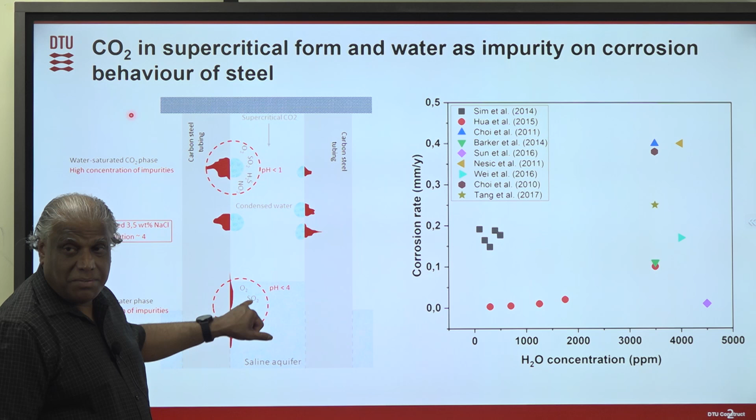Then the CO2 is coming down into the reservoir. CO2 is dissolved in the water like carbonic acid, then you have a pH of 4 or lower than that. So this is like normal oil and gas corrosion, or carbonic acid corrosion. This is what happens - only thing is that even in this case you also have H2S, SO2 and things like that, because that's the part coming from the carbon dioxide.

So here we can see the importance of this - people have done this work. We collected this data from the literature and we are trying to plot it. You can see that different people have done this work, looking into how, with the increase in the amount of water in the CO2, the corrosion rate will change. You can see that it goes up with increasing moisture content in this one. Understandable, right? Because that moisture content makes these gases dissolve, and that way you can have the corrosion problem. So that's what we are trying to look at.

So what we try to do is, since we have a lot of impurities, we do this design of experiment to see really what range of composition we need to take. So we study oxygen from 1 to 10 ppm, and all other things starting from 10 to 1000 ppm, in the lab scale. And why we do that 1000 ppm - because you can see here SO2, H2S is only 20 ppm or SO2 is only 50 ppm, but in the lab scale experiment we study with 1000 ppm.

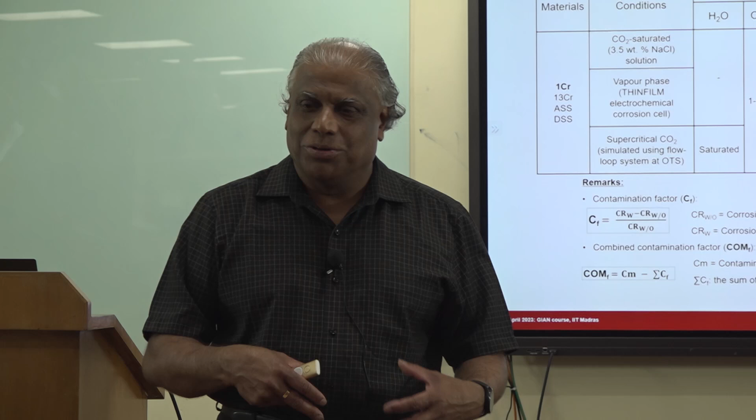Because in the lab scale we are doing the experiment not with the supercritical CO2. We are doing it with 3.5% sodium chloride saturated with the CO2.

At the same time, we want to simulate this condition. Although there is 50 ppm SO2, when that is dissolved, it becomes a very high concentration. So we simulate that high concentration, and that's why we go up to 1000 ppm in the testing. We do these different contaminations, mix them up, and then do DC polarization, AC impedance, and subsequent SEM analysis to understand how the corrosion is occurring and to learn the mechanisms.

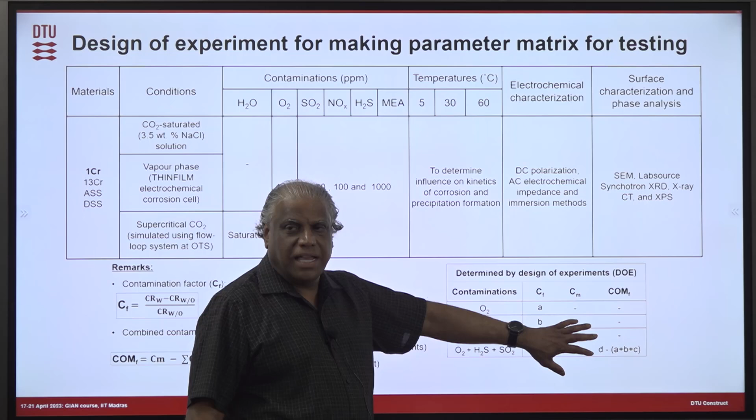We also do the experiments in a design of experiment way, because once we have that data, we can use it with our machine learning algorithm to build the model.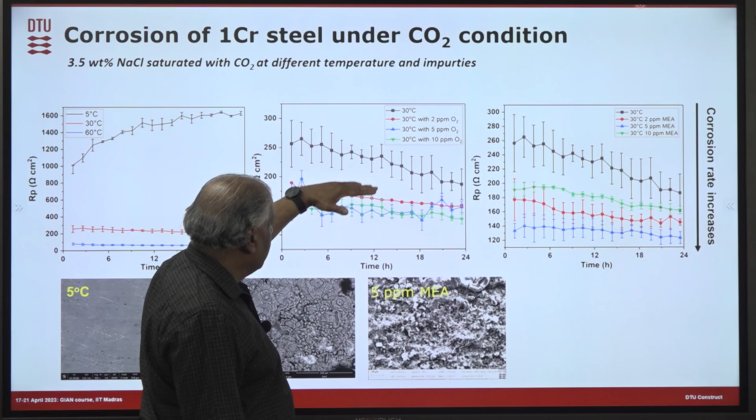This one studies oxygen concentration effects. Starting from 2 ppm oxygen, when you add it, there's an increase in corrosion rate, but even adding more oxygen doesn't change it much, because there's a saturation value—the amount of oxygen that can dissolve in the water.

We also study monoethanolamine, because amine is used to capture CO2—it binds with CO2 to capture it, which is how CO2 is collected. This leads to contamination by amine, which is why we study it too. We run many experiments like this, and then do scale analysis to see what is forming and so on.

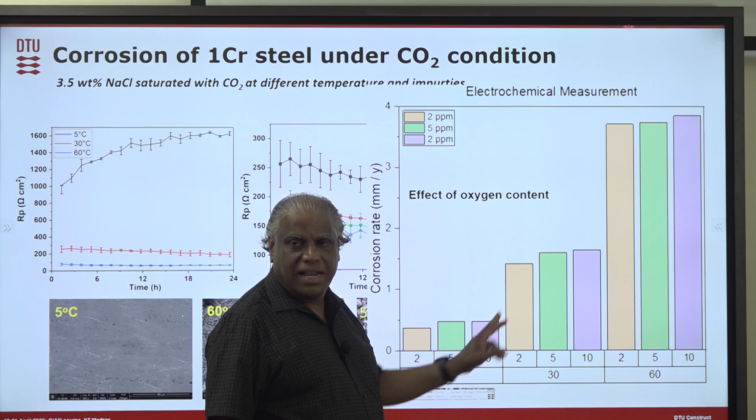Just to show a glimpse, using oxygen content as an example, you can see the temperature has a very clear effect. So we should expect a very high difference in corrosion rate from the top of the well to the bottom, because of this when they inject.

We do experiments, as I mentioned, in three ways. This is another important one: normal electrochemical experiments, using an electrochemical cell with a three-electrode setup. We do this in 3.5% sodium chloride and add whatever contamination we want, gaseous or ionic. We have the capability to get oxygen into the water, get H2S, put SO2 and CO2 in, and do experiments like that.

But this experiment doesn't give us the total picture, because it's at atmospheric pressure. When supercritical CO2 is injected, the pressure is probably 300 bar, in supercritical form. So we use a flow loop experiment with a company we collaborate with, which has a flow loop that can reach actual 300 bar pressure, and inside these chambers you can actually get supercritical CO2.

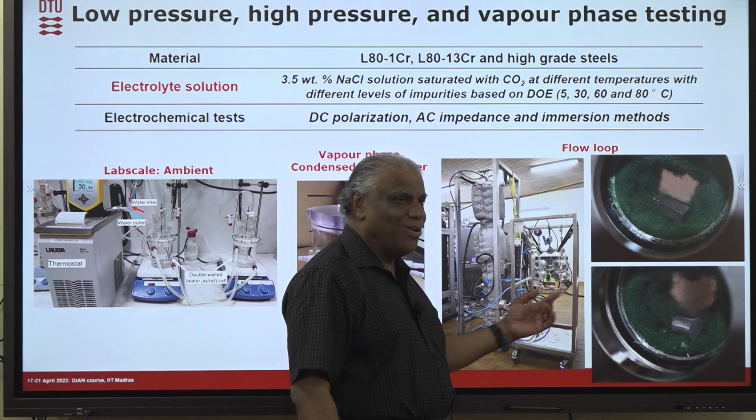Supercritical CO2, and we can contaminate that with whatever amount of water or gas we want. So exactly like what CO2 is injected, that's what we test here. The problem with the flow loop is that this testing is time consuming and requires a lot of things. So that's the reason we do the lab experiment, so we can screen the parameters here.

Then another thing is the vapor phase, right? I mentioned you get this condensation corrosion. To study that mechanism, we also build a cell like this. In this cell, we can put the sample on top in a specific way, and then we can cool it down so we create the condensed water layer on top by cooling.

And to this chamber, we can pass H2S, CO2 and all those things. So this thin layer of water will be saturated with all these gases, and then we can do the electrochemistry like that, so we can do the vapor phase corrosion studies here.

We are so much familiar with this. We're now using it for this application, but all our electronic things corrode this way, so we're familiar with this condensation setup and things like that. We also have equipment to measure how much water film is forming, which you will see tomorrow. So that's the three ways we do the experiment.

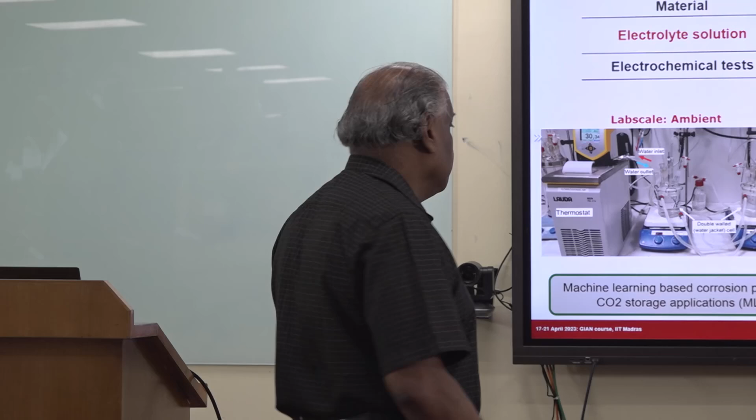No, all these are ambient conditions. That's only what we can do, but we can simulate the condition in a way and get an idea. At the end, though, we need to do the flow loop.

Yes, you can control the water layer thickness by adjusting the temperature. We pass a coolant through this, and depending on the coolant temperature, we can control the water film thickness.

We can go down even to 1 micrometer or lower, really lower. The question is what thickness level we can measure. Probably 100 to 200 nanometers is the level at which you start seeing the electrochemical current pass easily, and that's when you start getting the problem.

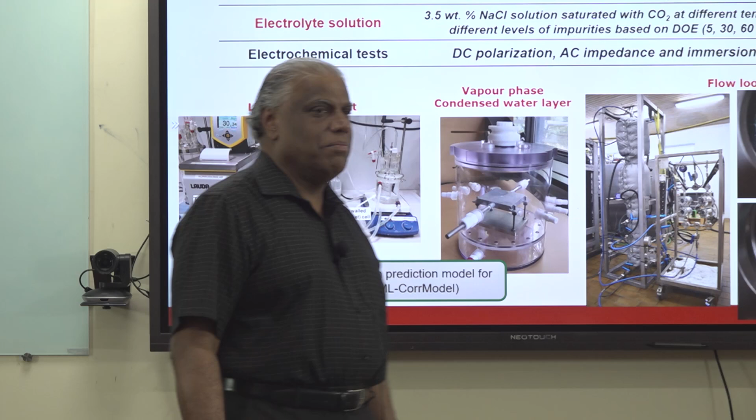Let us discuss that tomorrow, because tomorrow I'm going to show more things related to that.

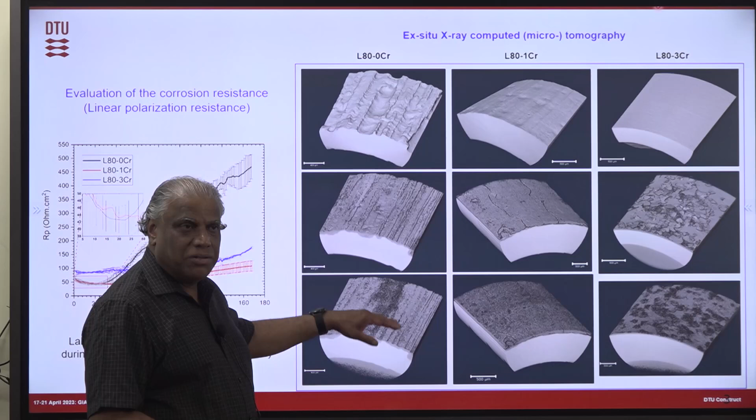So one side we do a lot of mechanistic type of understanding, and the other side we do this corrosion data build up so that we can build the model. We have many projects looking into different things, but the idea is, at the end, if you get the corrosion data, then we can develop a machine learning model which people can use for sensitivity analysis.

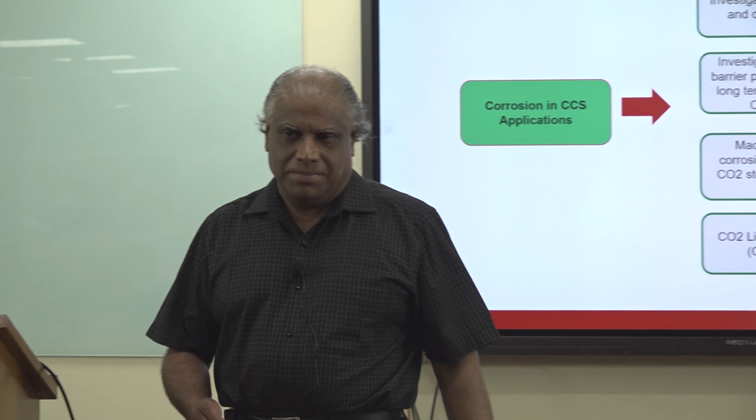Fuel cells and electrolyzers, I don't have so much to tell, probably the group here is better to tell more on that, because Lakshman's group is working on that area more. But I just put this to say that the fuel cell or electrolyzer area also has a corrosion problem. There is a lot of corrosion problem to solve, a lot of things the corrosion people can get involved in. One of the main things in this case is the bipolar plates.

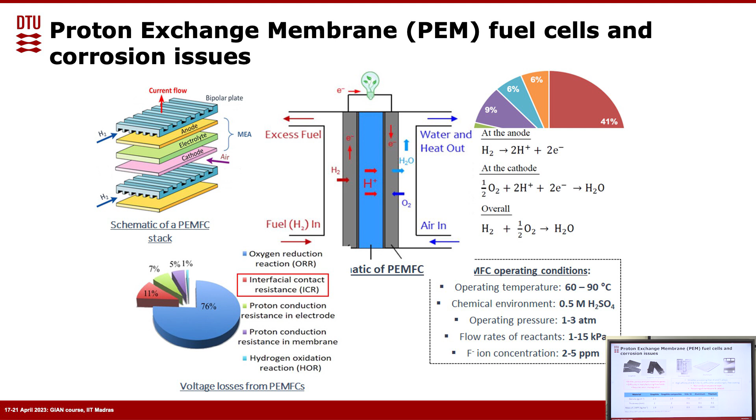And that way there are a lot of corrosion problems related to these bipolar plates, and that is something many corrosion people are looking into because of this environment. Not only that—if the bipolar plates corrode, there's another issue: it also contaminates other areas, like the membrane and other regions, because of this corrosion problem. So that's one of the serious things in fuel cells. Especially this kind of design, because it's a much rougher type of surface, which can also increase the corrosion problem.

A similar way, you also have the problem in alkaline electrolysis. There, the problem is that they use nickel electrodes for the alkaline electrolysis. But when the alkaline electrolysis is stacked together, there are many other materials coming in as part of the pumping system and things like that. So there's stainless steel at many places, and the stainless steel is dissolving. Alkaline electrolysis is done at 30% KOH—you can imagine the alkaline condition that makes some of the steel material dissolve.

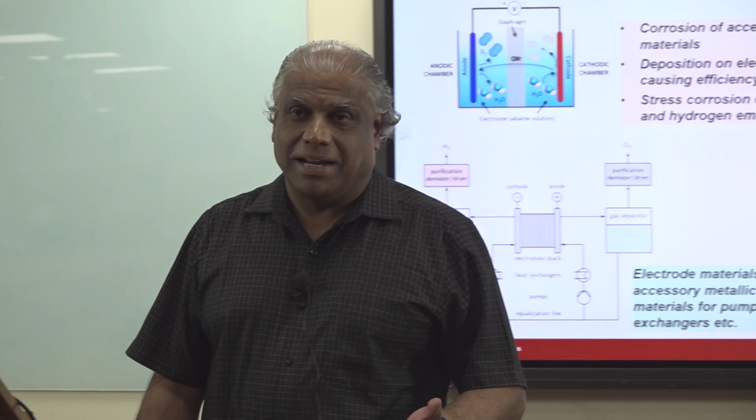This steel material dissolving into the electrolyte, in the electrolysis process, will come and deposit on the cathode, because it's a cathodic process—you have a reduction process at the cathode. So whatever metal ion gets into the solution will come and deposit there. If chromium is dissolving from the accessory materials, chromium will come and deposit and change the efficiency of the electrode. So this is the issue with the electrolysis process.

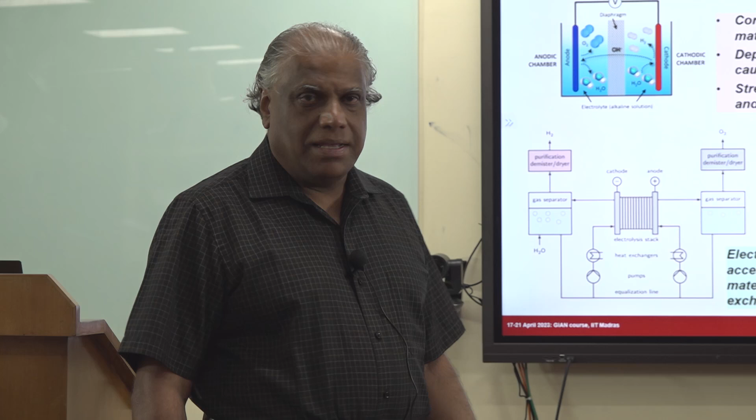So you can see here, this I took from the literature—they studied the corrosion of many different alloys, all in alkaline 30% KOH conditions. Why do they do that? Because they want to understand what happens when these materials are used as accessory materials in the electrolysis. We don't work in that area that much, but we are going to get our first project in this area from June, looking into the accessory material corrosion in alkaline electrolysis and how that degrades the cathode efficiency and things like that.

Actually, there are more problems than just corrosion and deposition, because this material can also have a stress corrosion cracking problem in some cases, due to the stresses involved. So there are a lot of things for corrosion people to do here. There are many other energy sources we don't discuss today, but there are energy systems corrosion issues there too.

Geothermal energy is a big thing in Iceland, and there's a lot of materials used there, like in oil wells. There's a lot of corrosion problem there. Solar energy, I didn't take that into consideration, but solar energy also has a lot of corrosion problem.

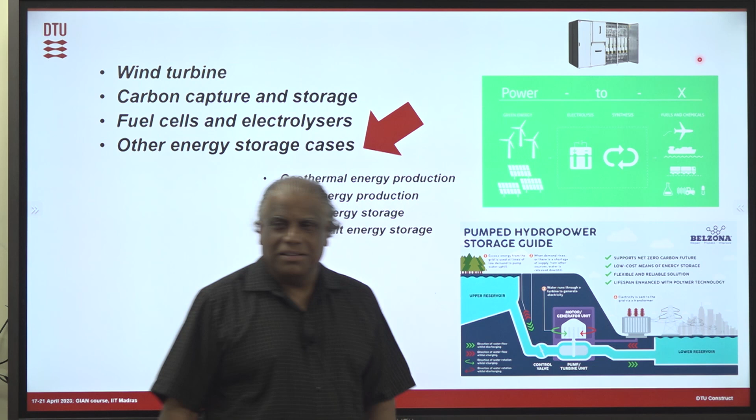These days people are also talking about hydro energy storage. I just submitted a proposal together with other people on that, and somebody else submitted from Norway, where hydro storage works like our dam here. Basically, you pump the water when there is excess energy, then use that for running the turbine, and pump back that water again when there is excess energy. That's the idea for hydro storage. There are a lot of pump systems involved here, and again, a lot of corrosion issues.

Another thing is that with these water sources, sometimes they are using seawater, and seawater is very corrosive in this case.

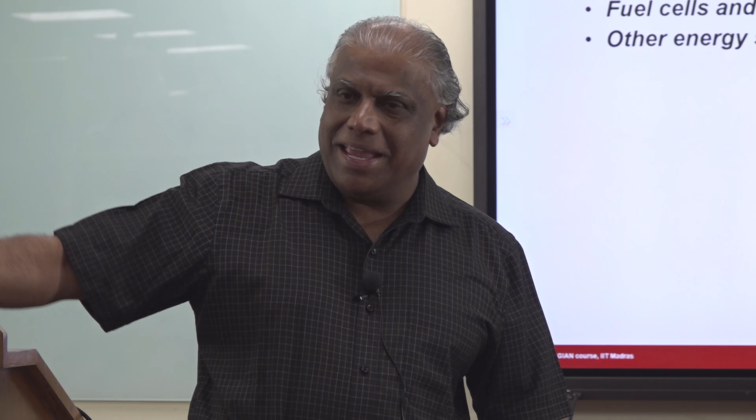So another energy storage system coming up is molten salt. Whenever there is excess energy, you take a salt, like sodium nitrate or sodium chloride, and at high temperature it will melt. So you use the excess energy to melt this and store it as molten salt, then use that molten salt to create steam and run the turbine when you need the energy. So there are many ways people are trying to store energy.

Melting the salt is one way. There's another one that some Danish companies are involved in, called rock storage. Rock storage means you just take a big rock and heat it, and when they want the energy, they blow out the heat energy using something like a fan, which they then use for boiling water to create steam and rotate the turbine. It's just a big piece of rock used for storing energy. So many storage systems are coming up, and I think everything will have a lot of corrosion problems as well. There is also electronics, which we'll look at tomorrow.

Okay, so I think that is what I have here. Is it becoming too late now?